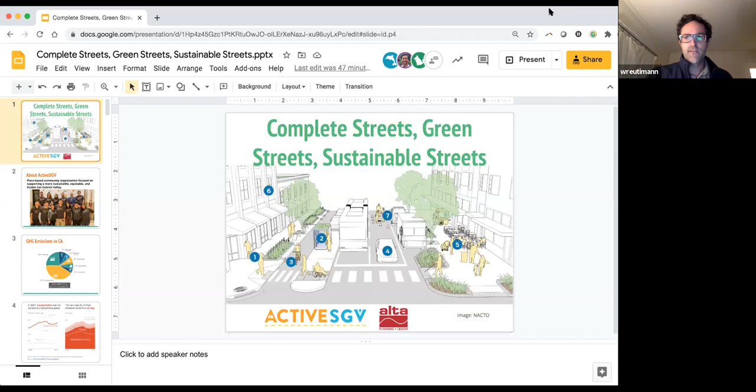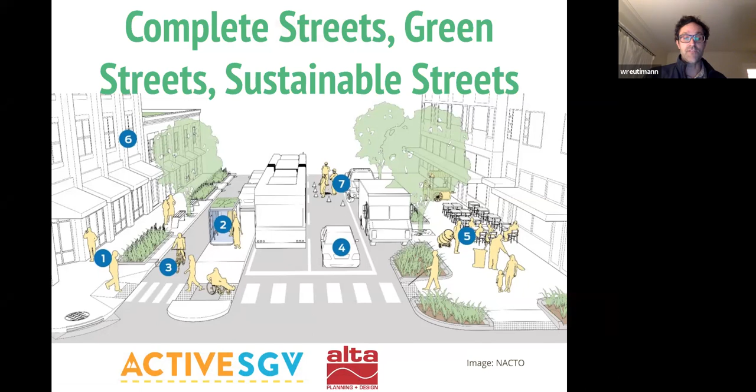A little bit about Active San Gabriel Valley. We're based in the central SGV in the city of El Monte, and rebranded a couple of years ago to really focus on sustainable, equitable, and livable communities and fostering them as much as possible.

So a little bit of context before we get into specific streets, design, and approaches to improving streets. Greenhouse gas emissions in California: we've been very effective compared to other states around the country at reducing emissions in every sector except for transportation.

If you account for the emissions associated with extracting, refining, and distributing oil, it's actually over 50% of all emissions in California are from the mobility sector, and that continues to increase. Everything else has been declining, but we are still going backwards on transportation. So again, top source of GHGs, and the vast majority of those are from vehicles, passenger vehicles and trucks.

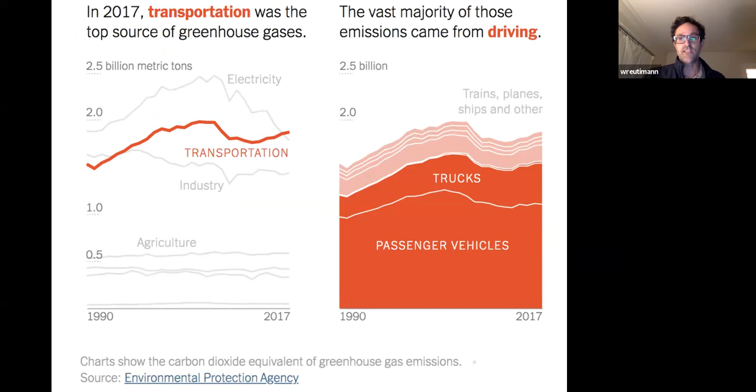One of the issues we're facing is SUVs continue to contribute more and more to those growing numbers. A couple of years back, they already comprised the majority of new vehicle sales in California. And as you can imagine, most vehicles are going to stay on the road at least a decade, which is past that crucial 10-year timeframe we're working against on really reducing our emissions.

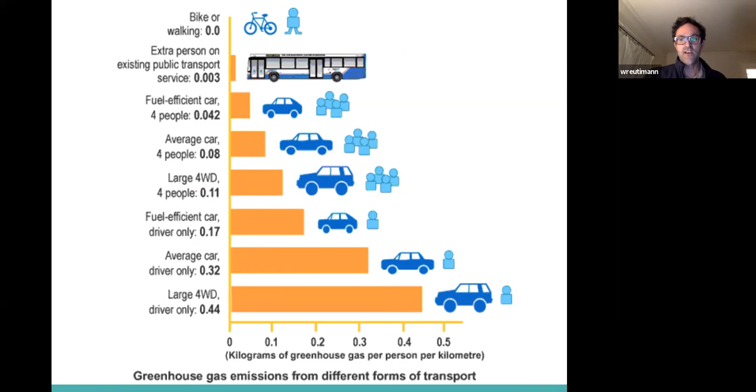So how do vehicles stack up compared to other modes? I think this illustrates it quite cleanly. Walking and biking is truly zero emission, and public transit is almost as good. Carpooling quite a bit after that, and then as you can see, it goes down with the SUVs, especially the larger ones, emitting a lot of emissions, especially when they're driven alone.

So how do we start reducing these emissions? Number one, we have to reduce how much we're driving. The planners will refer to this as vehicle miles traveled, basically how many vehicle miles on average you travel a day. So how do we do that?

We start replacing car trips with other trips, transit, walking, biking, etc. Also making it easier for people to get where they need to go. So that means infill housing, putting housing closer to jobs.

Electrifying transportation, this is probably where the most emphasis is. We get all the media coverage about everyone's gonna have an electric vehicle and that's gonna solve all our problems. California Air Resources Board has made it very clear that it is not a cure-all. We cannot just get EV everything and achieve our goals. But it is certainly an approach we need to take.

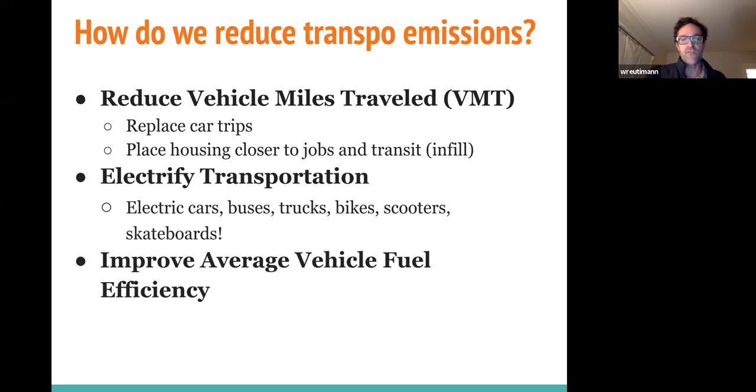And then improving our vehicle fuel efficiency. We're going to talk about mobility, especially green mobility, and how we can make that easier. So one of the things you've probably seen in the last few years, there's been more and more lightweight electric assist vehicles, whether they're mopeds, scooters, or bikes.

However, active transportation is still the greenest, and it's also the healthiest. Tremendous benefit to integrating walking and biking into one's everyday lifestyle. So when we talk about sustainable, green, and complete streets, what does that mean?

In a nutshell, it means we're taking a real big shift from what we did for the past 70 years when we were really just focused on moving cars down streets. We ripped out all our old trolley lines and public transit infrastructure in Southern California, designed everything around moving as many vehicles as possible. And we evaluated streets based on how many cars we could move through an intersection, and that's how we graded them.

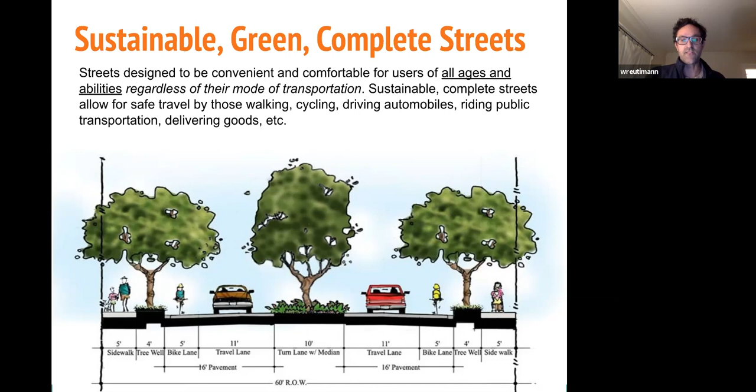Complete streets refers to designing streets that accommodate everyone who uses the road, because it's not just people driving cars that are using our streets. So what are some of the things we can do, some of the elements of a more complete street?

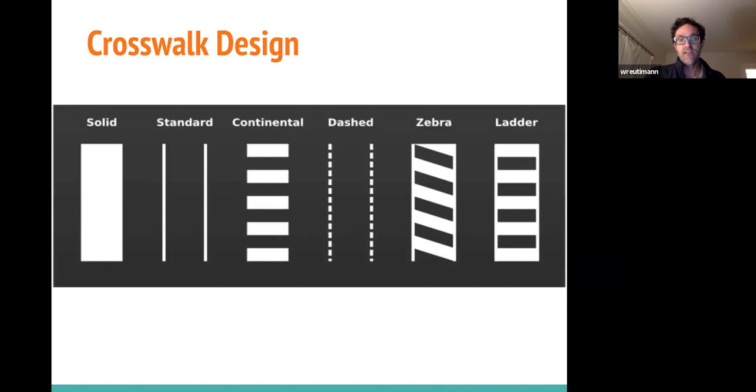Crosswalk design is one of the lightest, cheapest, easiest things you can do. The standard line, just the two parallel lines, are what we see for the most part in Southern California and a lot of parts of the US. It's not nearly as high visibility. Here you can see a standard crosswalk versus a continental crosswalk, which is more visible for drivers, and the research shows it improves the yield rate. Drivers are more likely to stop for a pedestrian in a continental crosswalk than in a standard one.

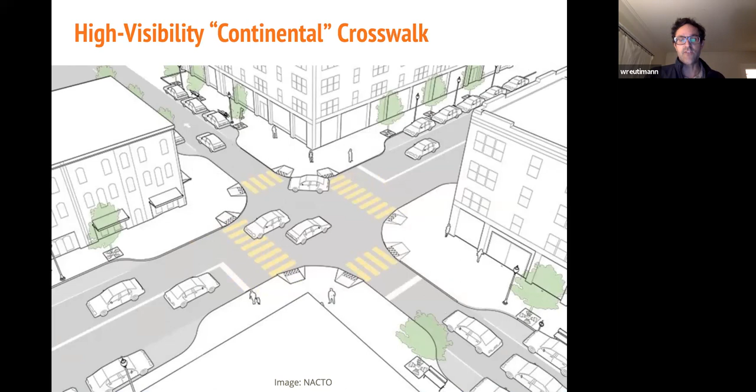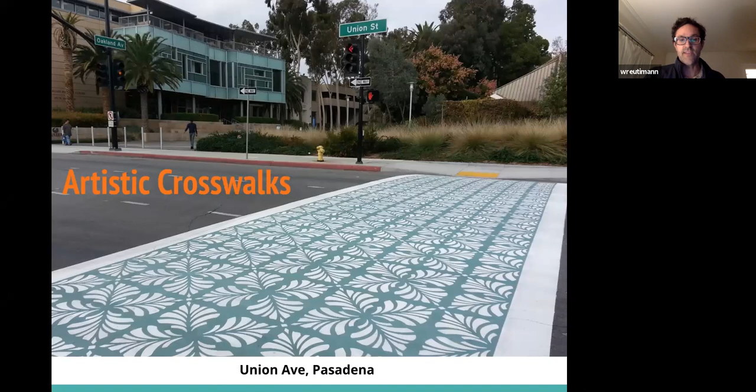You can also get creative with crosswalks. This is in the Playhouse District in Pasadena. Artistic crosswalks are a nice way to also incorporate placemaking into a safer pedestrian environment.

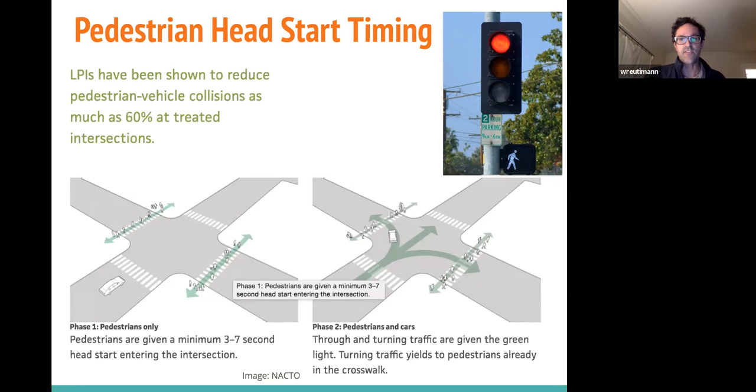Another one of the cheap, low-hanging fruit in terms of improving pedestrian safety is pedestrian head start timing. It essentially gives pedestrians a 3 to 7 second head start to cross the intersection before vehicles can start to cross. A number of cities in the San Gabriel Valley are already using these, including Pasadena and Arcadia have installed quite a few. I believe Claremont already has some as well. It has a really big impact on reducing the number of collisions between people walking and vehicles, and it costs very little - thousands of dollars, not tens or hundreds of thousands.

Lane widths is another really cheap one. We lead with these because so often in transportation projects, it's like, 'oh, we can do something, but it's going to take 5 to 10 years until we line everything up to get something done.' But anytime you resurface and restripe a street, you can narrow the lanes and create space for other modes - the same amount of space can create a dedicated bikeway, for example, or maybe a dedicated bus lane.

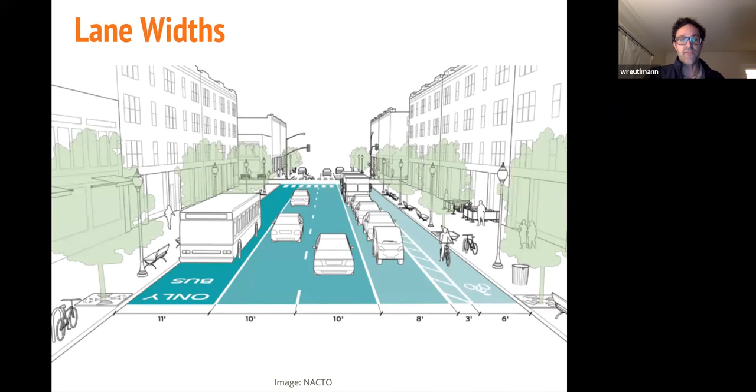Why do lane widths matter? The research is very clear that the wider the lanes are, the faster people drive. A 12-foot lane is Caltrans standard - that's what we have on our highways. A lot of cities still use 12-foot lanes, you'll see in the suburbs. Some are even wider if they don't have edge lines, and on streets where people aren't parking, the lane may effectively look like it's 18 or 20 feet. So people are going to drive faster on those streets versus what the National Association of City Transportation Officials recommends, based on the research, which is a 10-foot standard for a lane width that doesn't see a lot of bus or truck traffic.

Micro mobility lanes. If you narrow your lanes - and you may recognize the example here too - you don't necessarily have to get rid of a vehicle lane, but just by reallocating the space, you can create a safe space for people to utilize bikes, scooters, or other modes of transportation.

Here's an example of a protected bike lane, which is really the gold standard, particularly on any street where average vehicle speeds are 35 miles an hour or over, really 30 or over. It would be best to have a protected bike lane if you want to get a lot more people riding, not just the more fearless and experienced riders.

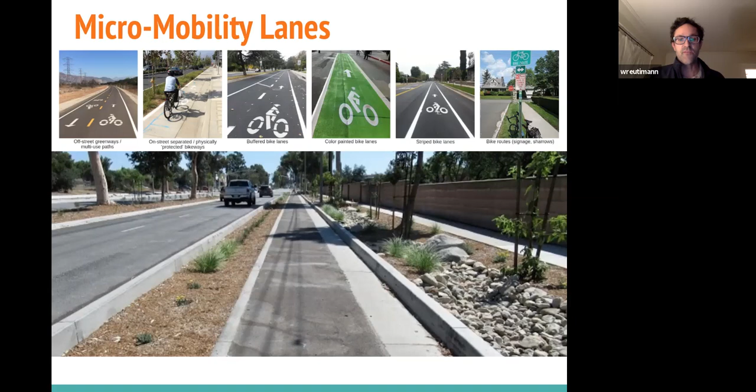Street trees, another huge benefit - both from reducing urban heat island, but also improving walkability and helping support speed management. Streets with a dense canopy of trees also tend to see lower speed limits, and one of the reasons why is it narrows the field of vision for drivers, which plays a big role in our outcomes in terms of street safety.

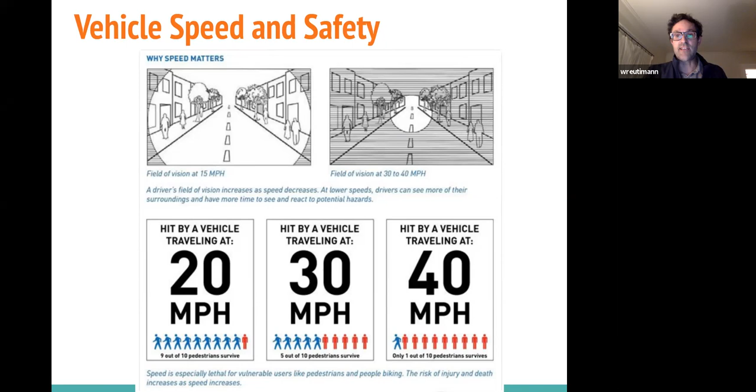Vehicles traveling at 40 miles an hour have a much higher likelihood of resulting in a serious or fatal outcome for someone walking if they're struck, versus 20 miles an hour. They're also more likely to get in a collision. So the faster you drive, the narrower your field of vision gets - more of a tunnel vision - so you can't see, for example, pedestrians as easily or other people who may be on the road. The other reason this makes a big difference is if you're driving faster, you travel more distance before you can actually recognize what's happening.

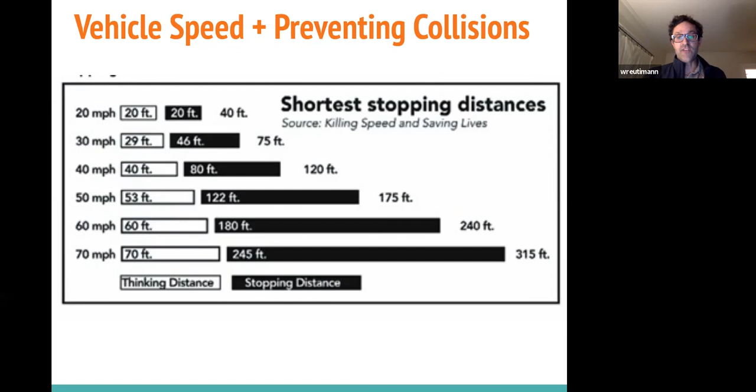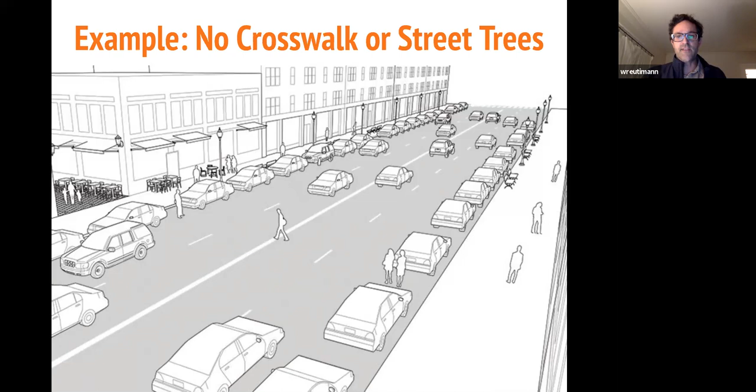So a couple more examples here before I turn it over to my colleague. Many of our streets in the suburbs here in the San Gabriel Valley look like this. We have a 4-lane arterial with not really any dedicated infrastructure for other users.

And this is the same street with an elevated crosswalk with a safety island in the middle. So you only have to make it across half the street before you can take a break and wait for traffic to yield, because unfortunately a lot of drivers won't yield to people in crosswalks. There are also street trees included here, and the curbs have been extended to shorten the crossing distance a bit. That makes a big difference too, because it effectively narrows the lane, so drivers are more likely to slow down when they encounter this.

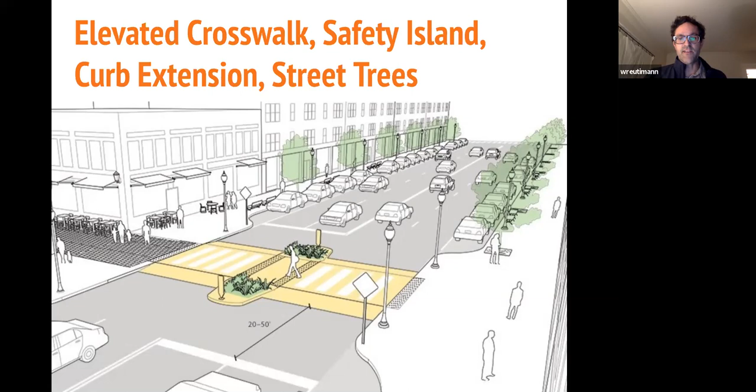Also, the amount of time it takes a person to walk across the street is shortened, so they have less exposure to traffic. And in this case, it's actually an elevated crosswalk, which is essentially a large speed bump, so it's physically slowing the vehicles too. There are not a lot of these in Southern California yet. In the Playhouse District in Pasadena, there's one on El Molino. There are a handful of others, but this is a technique to really calm traffic and make it safer for pedestrians to cross.

So what are some of the other benefits? We talked a little bit about physical wellness, huge mental and physical health benefits to adopting a healthy, active lifestyle. Aging in place, we're not going to be able to drive vehicles for our entire lives, most likely, and at some point we will have to relinquish our ability to drive on our own. So the ability to walk around or bike is a huge asset as we get older, if we don't need to drive all the time.

There's huge financial benefits as well. Cost of operating a vehicle is $6,000 or more a year. And air quality, obviously clear benefits. Quality of life is also improved, associated with the improved health and other outcomes. And economic development, if people are saving money from not having to own and operate a vehicle all the time, they have more money in their pocket to spend on other things.

Also, if you're just commuting in your car quickly through a community, you're less likely to stop. They've done studies on how much someone who bikes or walks through a downtown district spends versus someone who drives. It may be counterintuitive, but actually the people who are biking and walking are spending more money on average. Jobs is a clear one too, they tend to produce more jobs. A lot of these small projects to improve walkability and bikeability are more hands-on and require more manual labor.

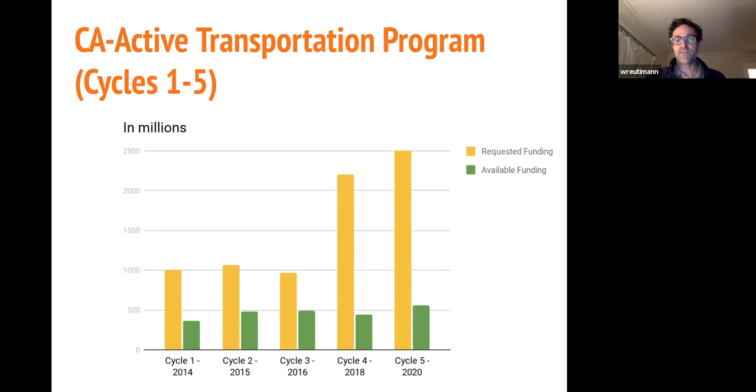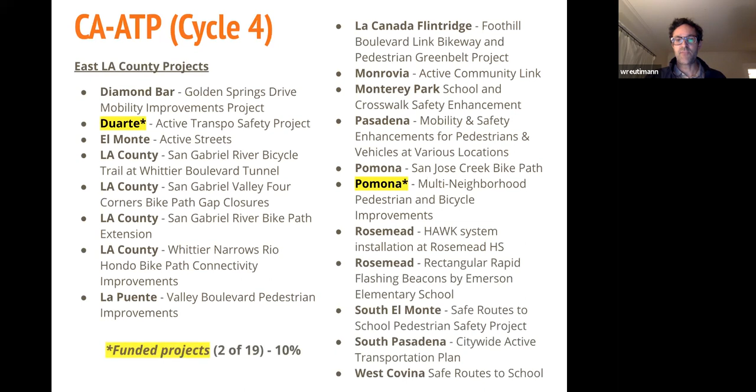A lot of cities honestly have given up over the past couple of cycles because it's become too difficult. For example, in cycle 4, these are all the projects that were submitted. Only 2 were funded in 2018, that was 10% of projects, 1 in Duarte and 1 in Pomona.

In cycle 5, we just got the results. We had a lot of proposals, but only 1, it appears, will be funded, for the community of South El Monte. This region has 2.3 million people living in it, and this is just a microcosm of the problem we have. There's just not enough investment in these types of things.

And this is despite the fact that voters overwhelmingly support walkability. We have really high rates of folks supporting improvements to safe routes to school, especially crosswalks. Cities are still moving forward despite the fact that there isn't enough money.

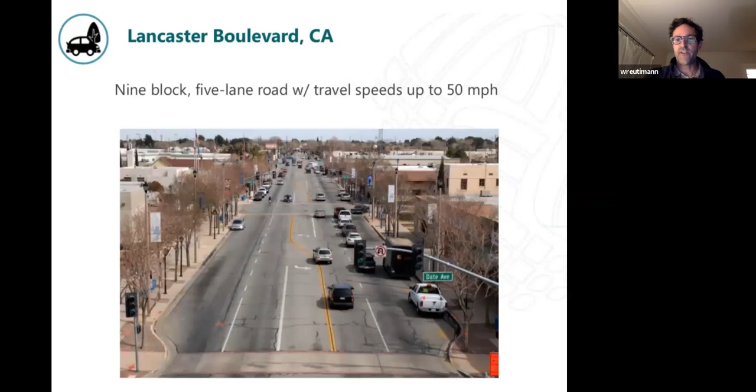This is an example in the city of Lancaster, Antelope Valley. They had a 9-block, 5-lane road with very high speeds, looked like a lot of streets we see around here. They spent 11 million to renovate it: narrow travel lanes, wider sidewalks, street trees, and it supported a lot of new development, commercial space and apartments, and created a lot of jobs. Sales tax revenue went up a lot, there were huge benefits to safety, a ton of investment, and it made it into a really inviting place.

That's one local example of an exurban community. But I'll turn it over to my colleague Ryan now, who will talk more about specific demonstrations and projects in the East San Gabriel Valley.

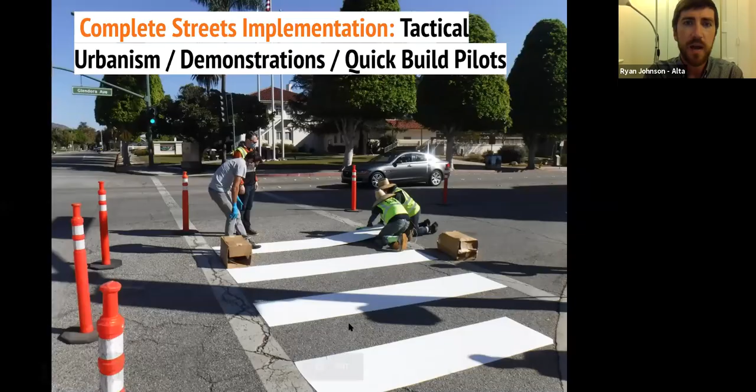As Wes mentioned, I'm going to cover some examples around LA County that I personally think do a great job of showing how cities can move forward without waiting for this funding to come in from the state. I think he's got it right on the head, we can't wait around. Sometimes even if you do get the funding, it takes 5, 6, 7 years to get the project on the ground, and we're really up against the clock if we want to move the needle on climate change.

This is just down the street in Glendora. It's a project that Active SGV has installed for the city that's been up for several months, where they put in protected bike lanes, crosswalks, and other elements as part of a demonstration. I'll show some other images later.

This slide is just to show that it really comes down sometimes to a few staff, and often volunteers can get involved. Steve Mateer, who is the city's transportation manager, is in the photo, out there helping install the crosswalk. This took 1 or 2 days to get the whole 2 or 3 block project installed, and it was just for a few thousand dollars. I think, Wes, you got a grant to pay for the materials, right? And it wasn't that much. So that was a fun example.

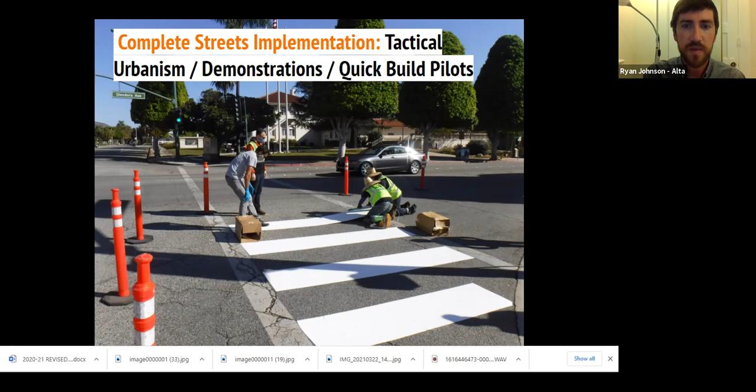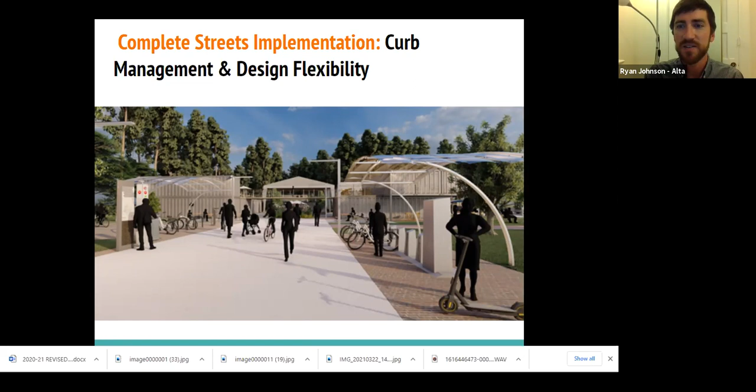Some other things that cities around the country are doing is building in design flexibility for their spaces. Taking existing infrastructure that you have now, such as existing plaza space, a park, or even a parking garage or parking lot, and making sure you're setting it up for future uses and different types of mobility devices that will come into play that we don't even know about yet. So as we're building new projects and developments, something to keep in mind is preparing for 20, 30 years down the road, and what the kids of today are going to be using to get around. We have to think a little open-minded about that.

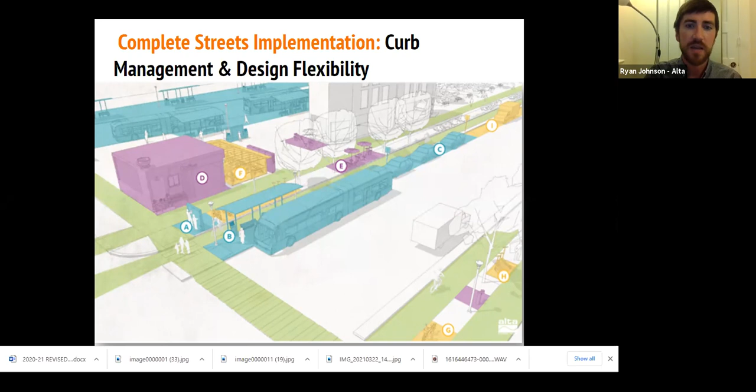Curb management is another tool cities are really getting into, thinking about how we manage that space where buses pull over, but now Uber and Lyft drivers are also stopping and idling to pick up and drop off customers. As you've probably seen in the Village in Claremont or other busy downtown areas, that curb space gets really congested, and right now it's not properly monetized unless there are parking meters. It's just an unpriced resource, so everyone uses it for free. There's no incentive to park a block away or drop someone off a block away and open up that space. So cities are thinking of ways to price that commodity while also opening up space for transit, bike share, and other forms of mobility.

I'll show a few other examples of complete streets projects. These bring in all the elements Wes already mentioned—protected bike lanes being really important to get a diverse range of people to use them, but also incorporating green infrastructure and landscaping elements as much as possible to get those co-benefits for transportation projects.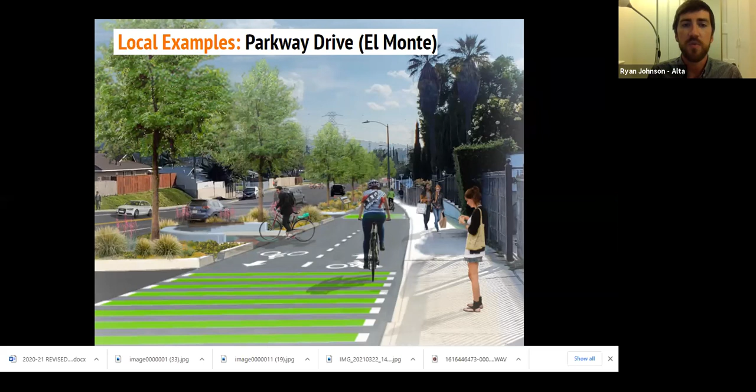Another benefit of working in the landscaping piece is that you can open up new sources of funding that aren't specific to transportation. There are urban greening grants out there focused chiefly on capturing stormwater and cleaning up the local environment, but that could also be paired with a transportation grant or an existing project the city already has planned, to make it more beautiful and user-friendly. These are just images from that same project in El Monte.

This is one of my favorite projects in the San Fernando Valley, along the Orange Line bus rapid transit corridor, where the City of LA Street Services Bureau wanted to find ways to make it cooler—not only in the environmental sense of cooling the earth, but also cooler for users out there on hot summer days. Right now, and you could see this all over the San Gabriel Valley too, people are waiting at bus stops in the sun without shade and without much green space around. This was a study for the entire Orange Line in the western part of the valley. We considered elements like shade structures that would be cheap to install, and trees, obviously.

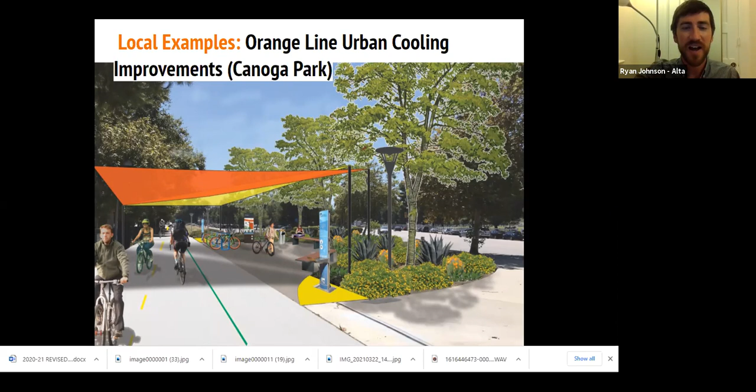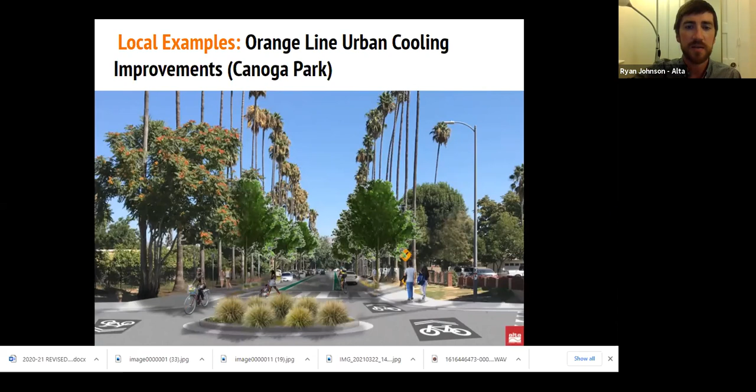We even considered misting stations where water mists out on people when it's really hot. And of course, having water fountains—which is such a novel concept in the city of Los Angeles and the county—providing public water stations matters, because not having water on a hot summer day in LA County can be dangerous. This is another example of a bike boulevard type treatment near the Orange Line, also incorporating landscape elements.

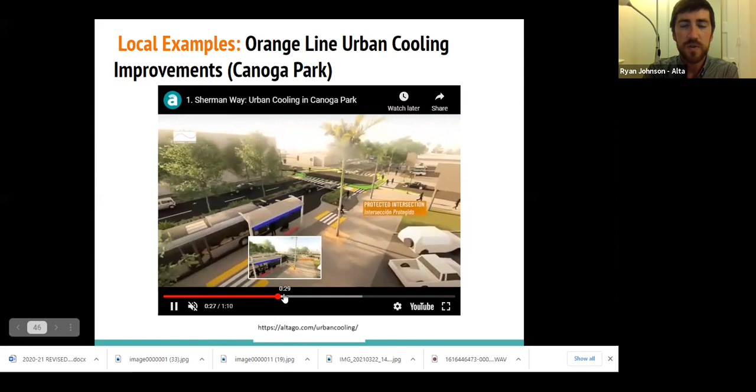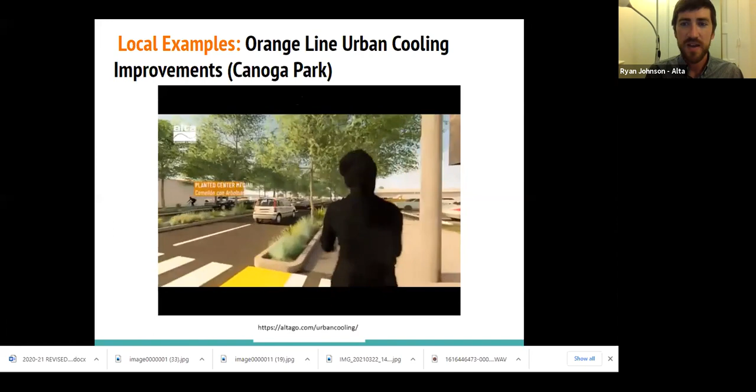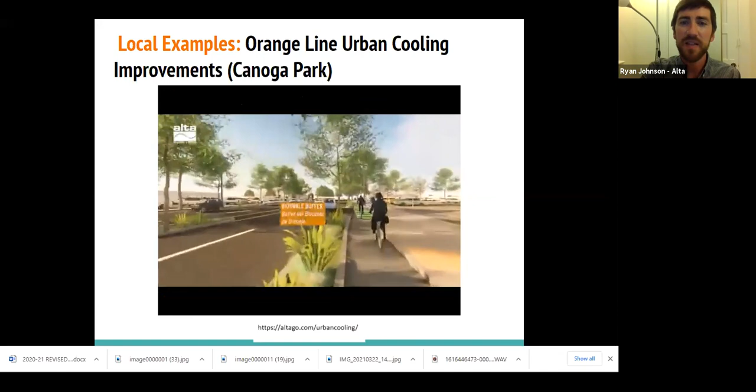I wanted to show a quick video—we'll see if this actually plays. We don't need sound, but I wanted to show how some of these elements look from the user perspective, which I thought was a great use of animations. This is a project our graphic designers worked on. It's really cool to show, because photos are nice, but to show these new concepts to people, we think using videos—even if not an animation, just going out with a GoPro and filming examples that already exist—is a great way to show the community what some of these concepts could look like. Obviously this looks like a more pleasant environment than a lot of the streets we travel on in our communities.

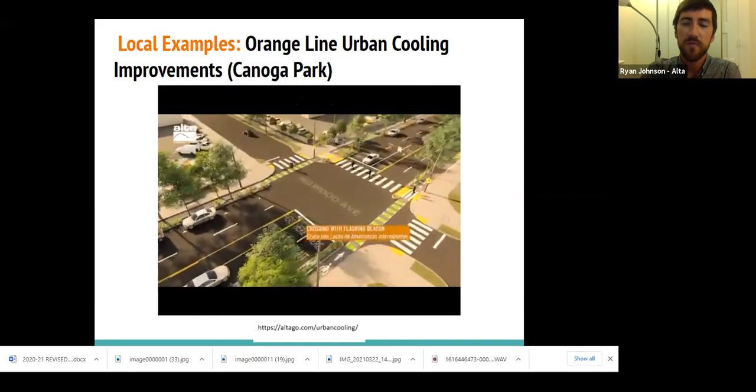I didn't mention the cool pavement. Another innovative technique the city of LA is piloting is reflective pavement on some of their projects, which directs a lot of the heat back up so it doesn't absorb into the street, cooling the immediate environment around it.

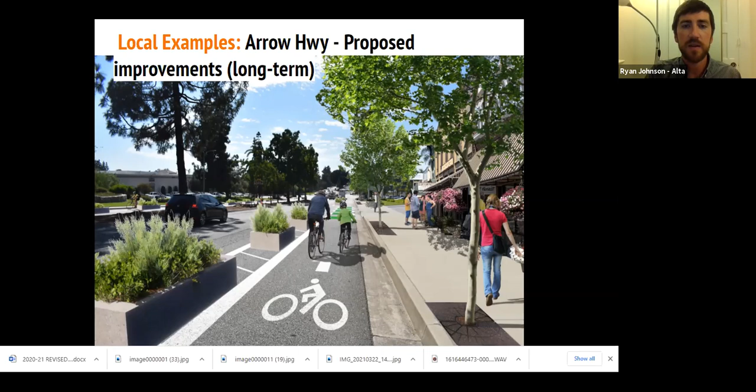So this was great, I welcome any questions about the plan. Wes was one of our partners on it, and we're really excited to work with the city of Claremont moving forward to implement this.